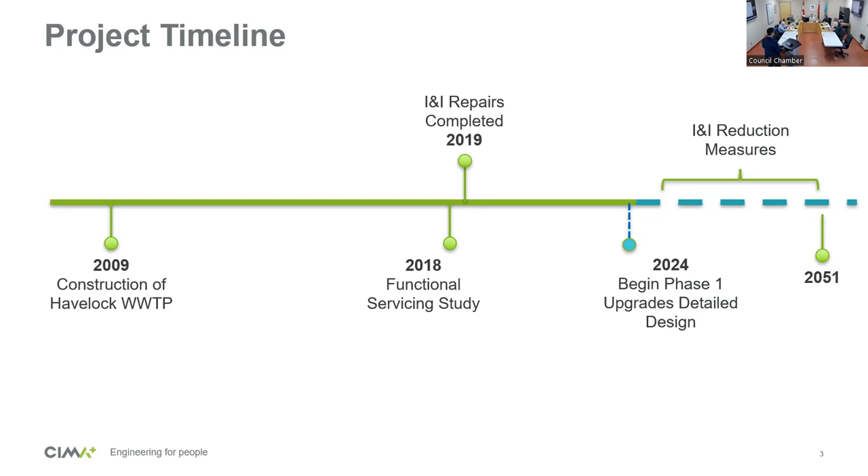There was an EA completed last year to look at alternatives, and if we follow that timeline, the proposed next step would be to begin phase 1 of the upgrades recommended as part of the EA. The other recommendation is to continue with I&I reduction measures to give you more capacity and recover some of the capacity you're losing through I&I. Then at some point, you're going to have the phase 2 expansion.

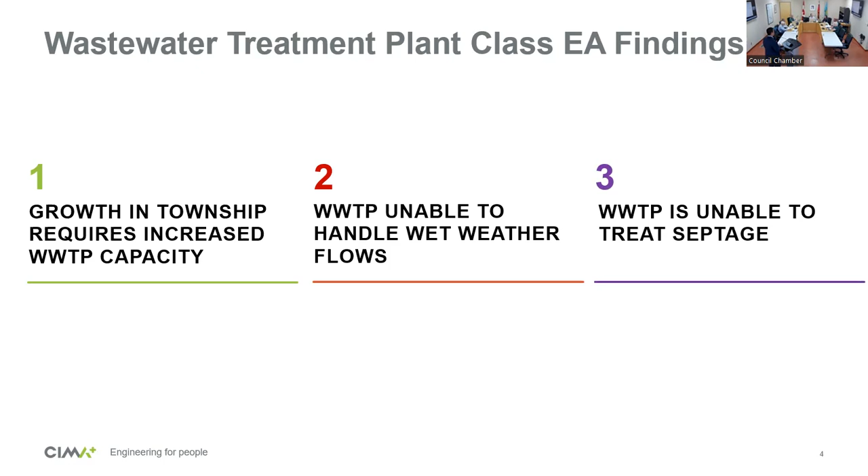The EA completed last year identified three main issues. There's growth planned in the community that's going to drive an increase in flows to the plant. There's significant infiltration and inflow issues during wet weather conditions that have exceeded, in the past, the capacity of the plant. If growth continues, at some point this might lead to environmental concerns and non-compliance issues. The third issue was that even though the plant was designed to handle septage from septic systems, because of all these constraints, it's limited in its ability to receive septage. So those are the main three issues identified, the first relating to flows and I&I.

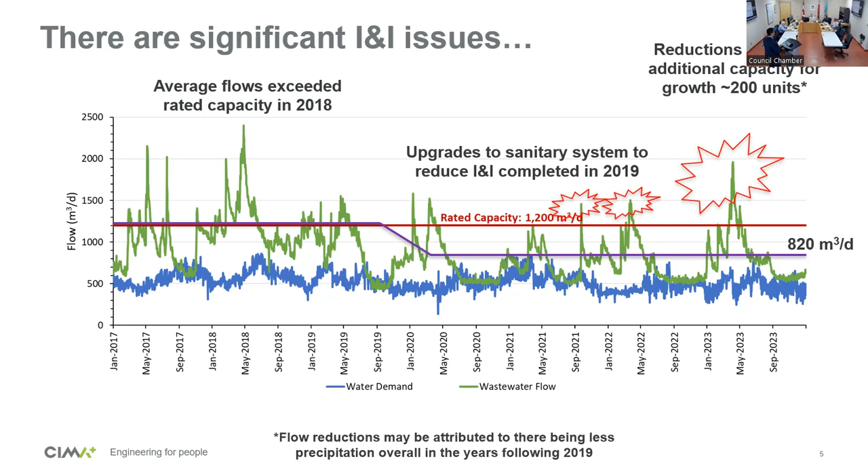So the Class EA recommended a staged approach to addressing the capacity constraints of the plant. The first recommendation was to do a phase 1 upgrade to mitigate the effect of infiltration and inflow, the wet weather flows. That was recommended to happen as soon as possible.

The second recommendation was to continue monitoring the flows of the plant and see the impact of your George Street project and other I&I reduction projects to see how much capacity you gain, and then continue pursuing reductions in I&I. As you saw in 2019, there was a significant drop in flows to the plant as a result of that project, which got you about 200 units of recovered capacity.

And then there's a financial component of these projects. You have to be able to find and fund the money for these projects, right? So there's rates and development charges, and then also funding opportunities that can be pursued.

And then the last step of the implementation would be a phase 2 upgrade, but that was recommended to happen later on, once you've got about 80 to 90% of your current capacity used. Depending on the timing of development, that could be upwards of 2040, or if development happens fast, it might push earlier.

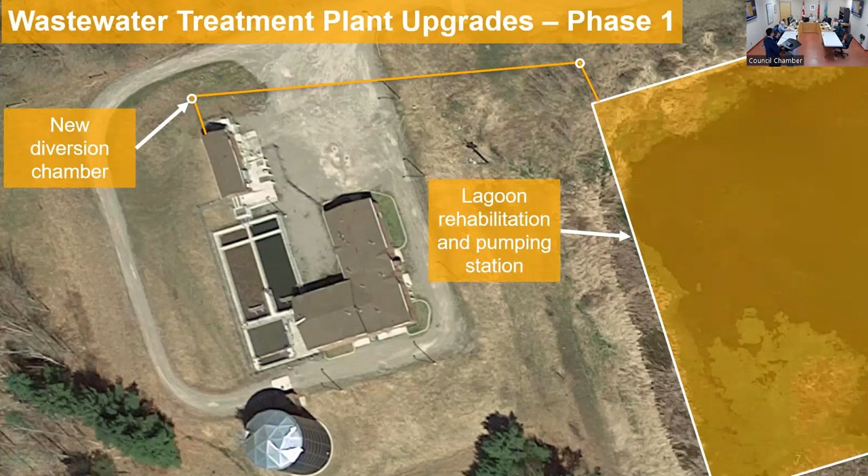So it's a relatively simple upgrade. It's a diversion chamber, retrofits to the lagoon, a pumping station, and some minor miscellaneous electrical upgrades.

So that's phase one. Phase two is significantly more complex because we are actually increasing the capacity of the plant from 1,200 cubic meters per day, which is what it's rated for right now, to I think 1,580-something was the number that was recommended. That's basically more flow, about 200 more units of development assuming 3 people per unit.

So that is a significantly more complex project because you are adding more processes to treat the flow. You're adding a new process train, another tank to hold the biosolids, more filtration capacity, etc.

And yeah, that's the cost. There's obviously a significant difference. Phase one, the estimated high-level cost is 5.5 million, whereas the phase two upgrade is significantly higher, close to 15 million.

So obviously there's a significant investment required for both projects, but the idea is phase one would be done first, as we talked about last time. Phase one solves one problem versus phase two solves a different problem. But the most pressing problem you have right now is the wet weather flow, the problem that phase one solves.

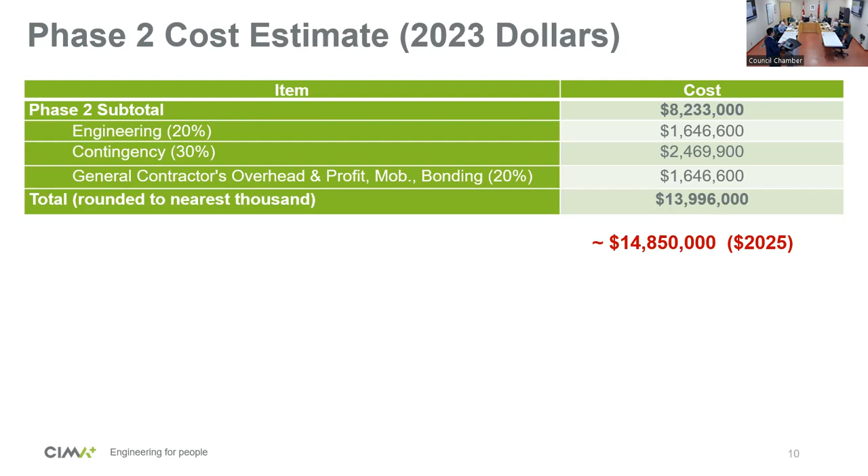So yeah, we're back to the questions. How much capacity would be gained by completing phase two of the project? We talked about the 200 units, depending on how many people per unit you've got.

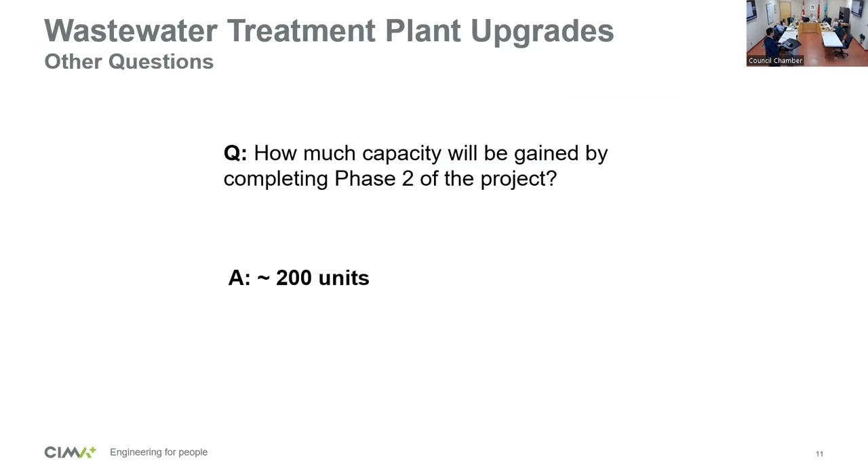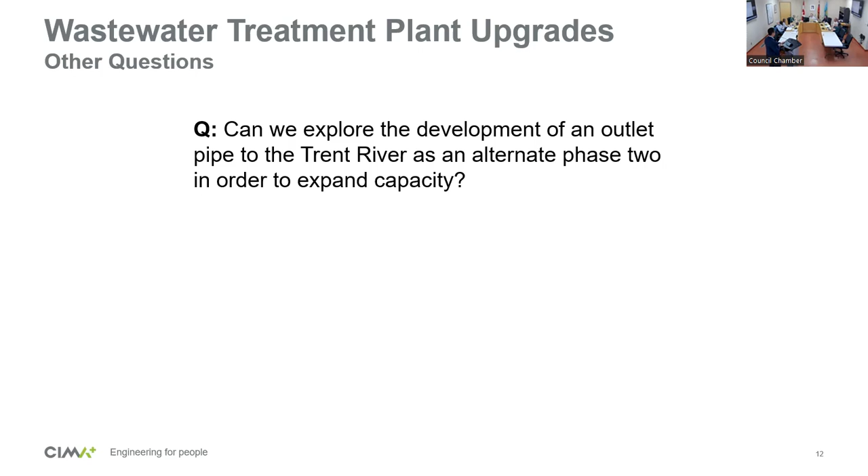We talked about the Trent River option as an alternative phase two. Yeah, it is definitely something that could be looked into. At a high level it doesn't appear to be cheaper, because of the distance you're pumping, the need for a new pumping station, in addition to the need to do significant planning and consultation with the ministry. But it is an option that could be explored in the future.

The EA process, I mentioned last time, is being revamped a little bit, but based on the current process, each EA study has a validity of about 10 years. So if you complete your works within 10 years, you don't have to redo the EA, unless you completely change what you're recommending. And then it could be easily amended if a new EA is required.

Noting that the ministry is currently changing the process for the EA, so it might not look the same as what the last EA looked like. But yeah, 10 years is the validity of the EA process.

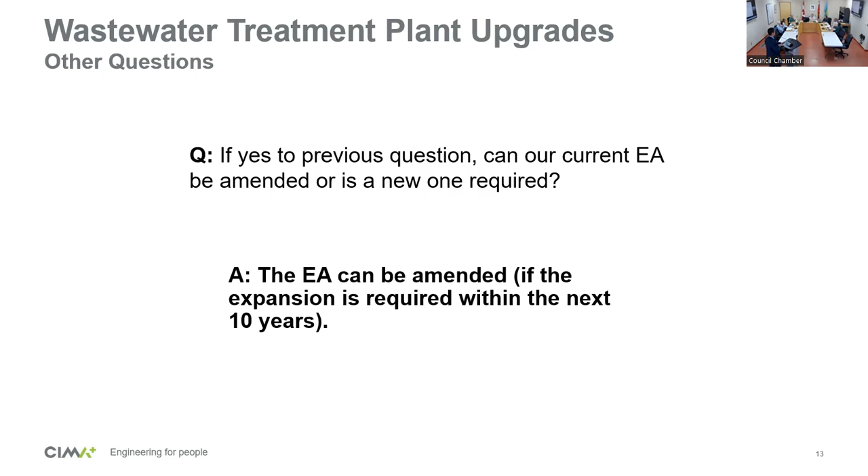We talked about how much capacity could be added with the Trent River versus phase two. So phase two, as it stands right now, is increasing the capacity of the existing plants. With the Trent River option you would still need to increase the capacity of the existing plant, but instead of discharging to Plato Creek, you're discharging down to Trent River. So the process itself would be slightly different, but you need a new pumping station and a force main to pump down to Trent River, and you still need a capacity increase.

Right? So it's just a question of how the expansion is done, not whether the expansion is done or not. So phase two is still required, whether you do it at Plato Creek or not. And then phase one, as I said, is an issue of dealing with those spikes in flow, and you would still need to do that regardless.

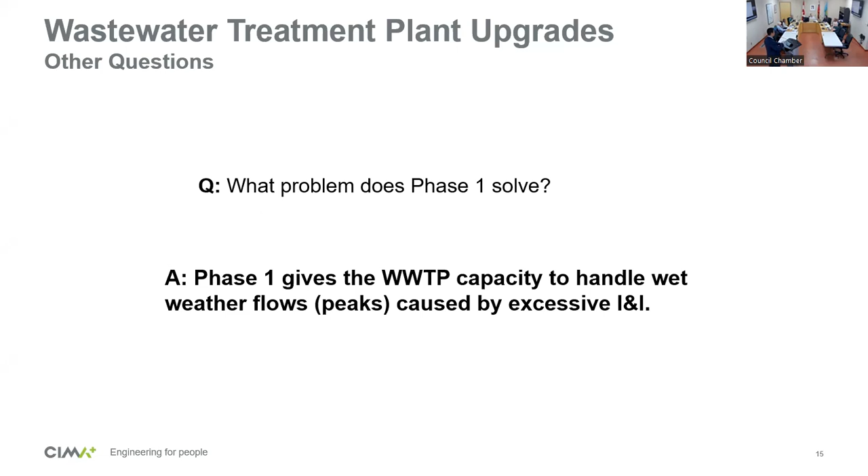So again, segue into this question, what problem does phase one solve? It's dealing with the significant I&I in your system and basically allowing you to treat a more gradual and more stable amount of flow into the plant, as opposed to dealing with those spikes caused by rain and snowmelt.

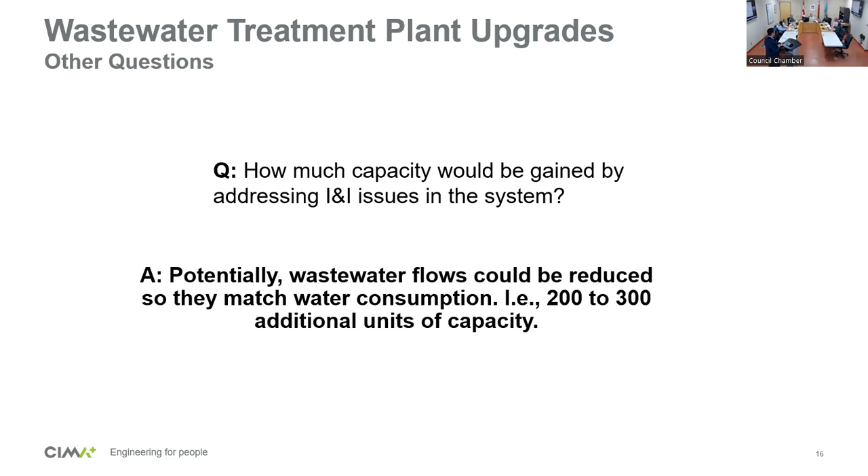This is another question that came up. How much could you gain by addressing issues of I&I in your system? Very difficult question to answer, but hypothetically, imagine that blue line, and I think I have the chart again. If you could make it so that 100% of the water that you use goes to the sewer system, and you could eliminate everything else that comes into the system, then both lines would look very similar. Then that reduction would be significant, about 200 to 300 units of capacity on average, if you could make those two lines come together, right?

You would expect in a sewer system that most of the wastewater that gets produced should be coming from your cooking, your showers, and so on and so forth. But in this case, there's a lot of other water getting into the system from the groundwater, from infiltration, from other sources. And that's water that, first of all, you're not recovering any rates for. And it's applying pressure on your system. It's costing you money to treat, right? It requires chemicals, it requires manpower, and it also takes away capacity that you could be using for development.

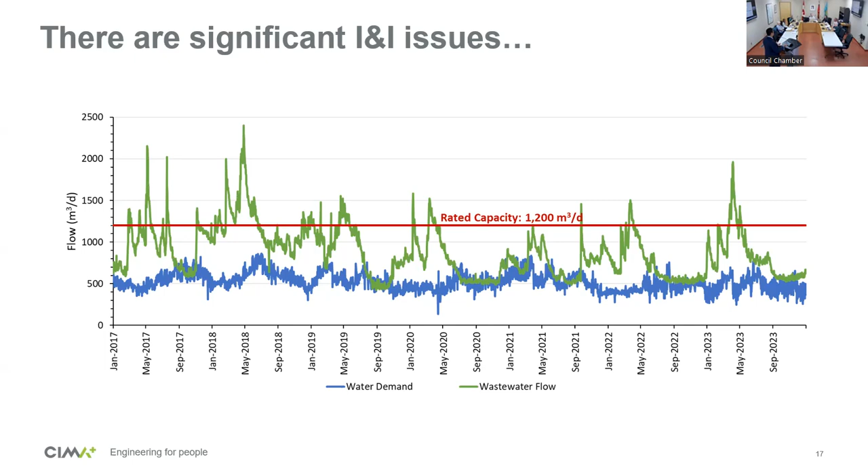So if you could make those two lines converge, then you could gain potentially up to 200, 300 units just by reducing all those flows. So Gustavo, using the lagoons would hopefully eliminate some of those green spikes. That's what you're saying? Yeah, you would still see that flow go to the plant, but instead of it having to be treated by the plant, now you store it. So essentially right now you're at 820 cubic meters per day, and you have a capacity of 1,200 cubic meters. So you could go up to the 1,200 cubic meters without fear of flooding or overflowing the plant, right?

So if we were able to get the lagoon going and help us on those spikes, would that allow us the 200 to 300 homes? Yeah, I think the report in the EA had a number. So right now we're assuming that long-term care projects continue, but beyond that, we really recommend you do phase one. Yes. And then the next trigger for the next study or next project would be when you get to 90% of 1,200, right?

So you'll continue to see once new units get connected, you'll see what the effect of those is on the system, and you'll see where you are relative to your line there. And then once you get to about 80 to 90%, you start looking at maybe getting more capacity in some way. Right? Yeah, the part I'm trying to figure out is to go and spend that kind of money on phase one.

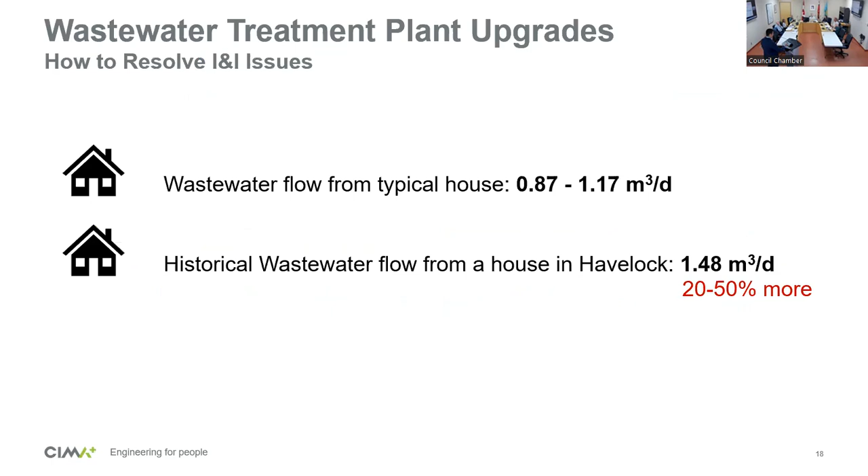So thanks very much. Yeah, and I think I have this discussion - this obviously came up last time. Was how do you fix it, right? How do you fix the I&I? Like I said, you could look at it two ways. You could look at fixing the problem at the source, if you will, or fixing it at the end, right?

And that's what phase one is - fixing it at the end, because that's where we can actually control it. But if you were to replace your whole collection system and seal it, and put all the joints and all the manholes, cover them, seal them perfectly, initially you could reduce all that I&I. Over time, you would still see issues, but obviously that's an expensive endeavor. We look at that number - $48 million if you wanted to replace your whole system - because you're digging up the roads, and once you dig them, you're replacing other utilities too.

So it's the same problem that other small and larger municipalities, frankly, are seeing - it's hard to fix stuff that's on the ground. Different folks choose to address it differently, but that's why we presented these two options, to say, okay, well, we understand $5 million is a lot of money, but it's cheaper than 48, right?

Yeah. Councilor Flagler had a question. I just had - actually, it's probably not so good a question, but I'm going to ask it anyway. So right now the rainwater is getting mixed in with sewer water, correct?

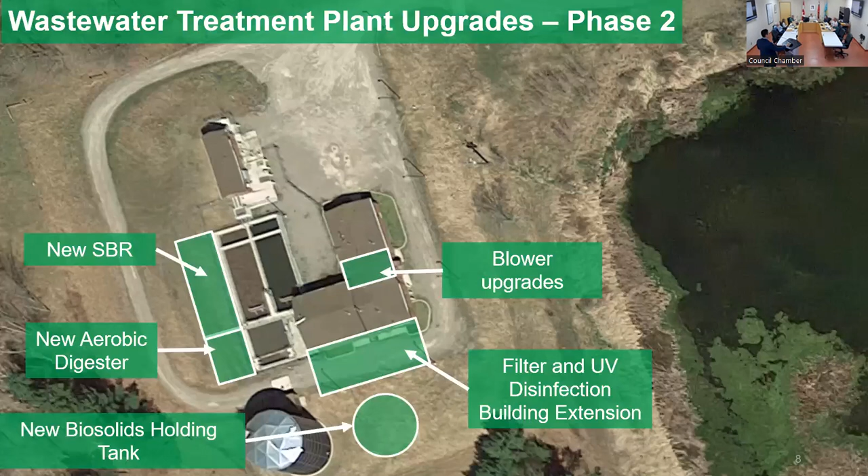We anticipate probably the top northwest corner. This is very conceptual, but you have to drain the lagoon, then build a berm just to isolate that corner, and probably put a liner on it to make sure there's no infiltration. On top of that, there'd be some piping that connects to a new pumping station to allow you to drain the lagoon.

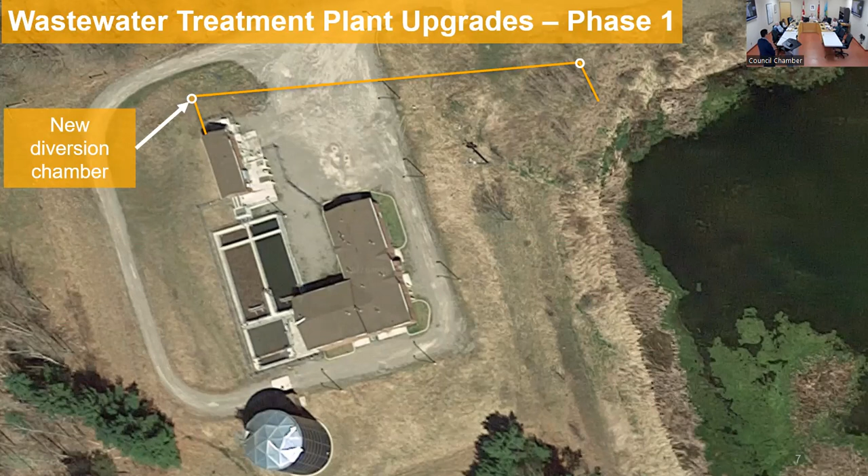That's why we discontinued the lagoons in the first place—we had a leak that was supposedly happening in the lagoons. That got us into the discussion of putting new lagoons in at the time. Some council wanted reed beds, like Stirling has, since it's a cheaper way of dealing with things—you don't have a mechanical plant, just let it do its natural thing. But in the end we went with the mechanical plant, excited to have 1,200 cubic meters and double our capacity. Then the infiltration issue came up, and it wasn't showing the results we expected. So that's where we are today.

That's kind of fixing it at the end instead of catching it in the road, but it's a cheaper alternative. Still expensive, and it looks like it could allow a couple hundred homes in the end to get us through to 2040, possibly. George Street's going to be a big thing to see what impact that has. Back when we first did this, I remember a leak we had up by the car wash—it was huge, the water was coming in like a fire hose. We fixed that, and you could see on those flow charts within that month it made a big difference.

If you look at eliminating the spikes, we're down around the 500 level, maybe 500 or 600 here. So if we have a place to put the overflow, we might even have that. It's just about being able to manage these spike events. If you put it in the pond or somewhere else, the rest of the time we're probably running at only half the capacity, if that, by the looks of it.

It also helps from an operations perspective—if they ever have a failure with a piece of equipment, they have the ability to temporarily store the flows rather than calling the ministry to say they're out of compliance. You have more flexibility to deal with risk. We did a similar project in Lindsay—they have a similar situation, with a lagoon used for the same application, and they're retrofitting it because they also have loss of land. So it's not an uncommon problem in this sort of application, especially since you already have the infrastructure there—it's just a matter of hooking it up.

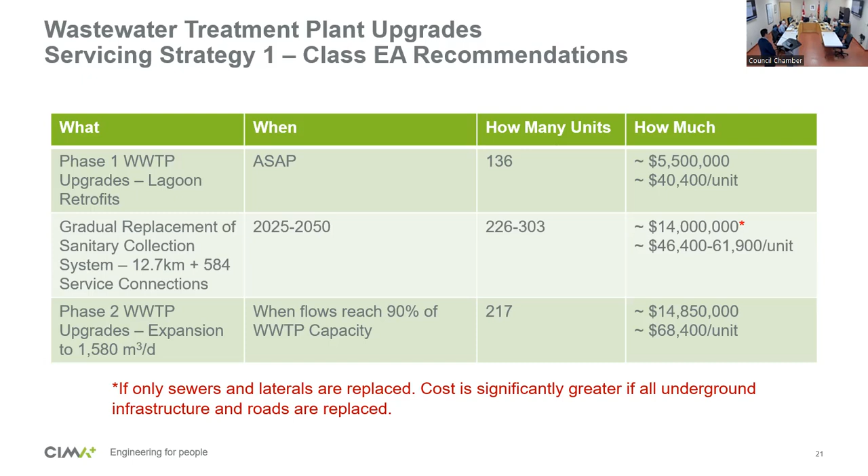So that's the first strategy, the one we recommended. Now just for illustration purposes, if you were to replace everything today - just the sewers - that's 14 million, but if you're replacing roads and water mains too, that's 48 million. So it's not cheap. If the question is where's the money coming from, I think it's easier to get 5 million than to get 48.

But just for illustration purposes, you see there's two projects. If you do fix your I&I problems, you don't need the peak attenuation - you don't need phase one. At some point you would still need phase two because you're going to reach your capacity, but if you could magically reduce all those spikes, then you wouldn't need phase one.

How do you magically remove rain? Yeah, I was just thinking Rogers is building all these cell towers - maybe we could get a dome put over Havelock and the dome down in Toronto, and it'll eliminate all the rain. You could direct it all just to the farmers' fields, to the gardens. We put eavestroughs around town, I guess.

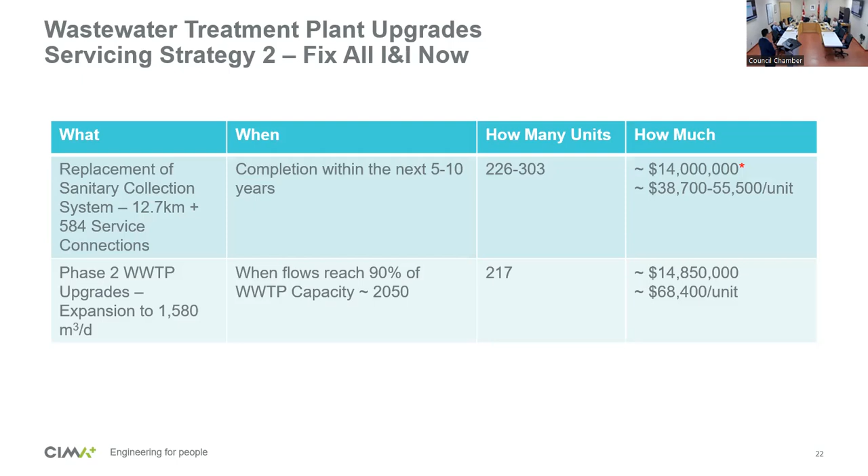Just to summarize the recommendations in the past: phase one, do as soon as possible. Understanding there's the long-term care project that's already been approved, but there are other developments that want to go ahead, we'd advise starting to look at phase one as soon as possible so you don't get in a situation where your capacity gets exceeded, and then continue monitoring flows to the plant.

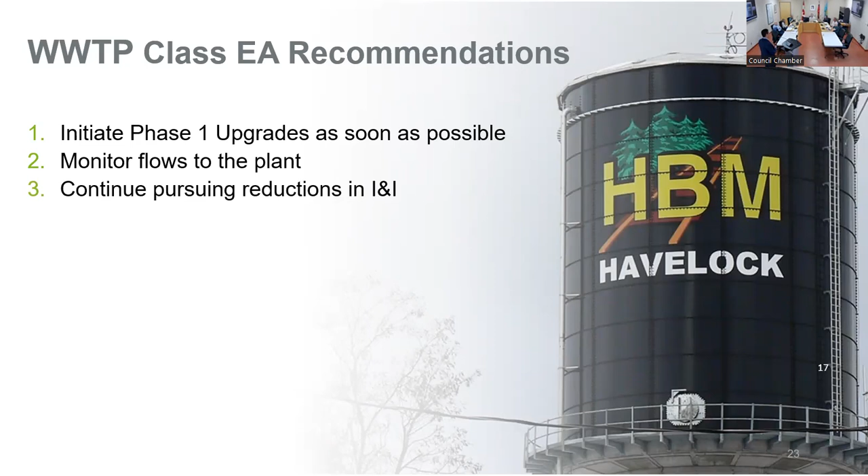Let's see what happens with that George Street project. Hopefully that gives you another 200 plus units of recovered capacity. And then as you grow, as your new units come online, see what that flow coming in looks like. When you're about 80 to 90%, that's when you want to start looking at the next expansion. And obviously there's that asset management, water, sewer rates, and DCs that complete the picture to make sure you're able to recover the cost of these upgrades through development.

And we talked about funding opportunities. We don't know of any active ones right now, but we know there's this push for new development from the province, so we anticipate more opportunities to apply for funding, and these projects typically emphasize projects that are shovel ready, if you will. So that's another thing to look into for sure. Phase 2 upgrades would be the last piece of the puzzle, if you will.

And that's it for the recommendations.

Yeah, I'm sorry, it's Monday, I'm a little slow this week, so 200 units capacity. Now, do I take 128 off of that for the long-term care? No, sorry, in what context, for phase 1, you mean? No, just the capacity. Sorry, the mayor's, what?

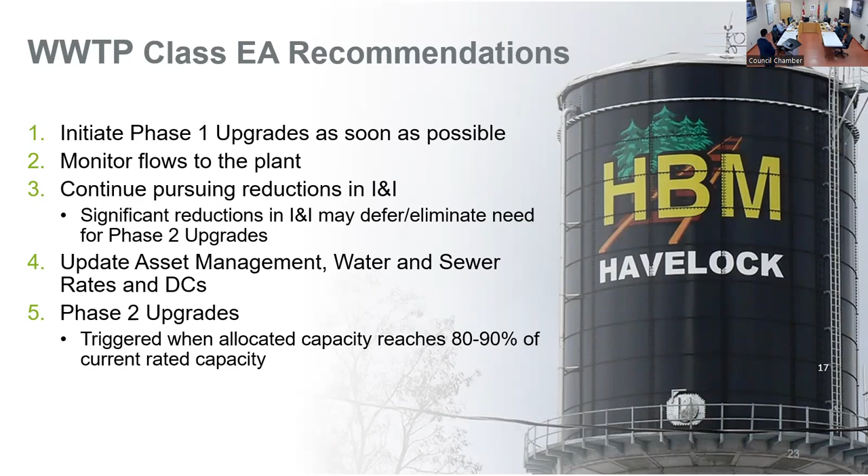So maybe I'll go back to, if you know specifically which slide number, but we've been throwing this 200 number around. Sorry, it's just, I don't mean to interrupt, but there are significant I&I issues, and then it says reductions provide additional capacity for growth of 200 units. I see, okay, so that to me is pretty straightforward. Yeah, so either we have or we have not.

I think in the context, sorry, I confused you there. What I was talking about here is, if you compare the flows from 2018 to after that leak or whatever it was that was found in 2019 was fixed, what that essentially gave you was a reduction in flows equivalent to 200 units, right? That was if you look at 2018 versus the average for the last few years. So that has nothing to do with the long-term care or the phase 1 expansion. It's just simply saying there was a significant reduction in flow between 2018 and now. That's all it's talking about. It's not referring to how much capacity you have now. It's just saying that you reduced the flow between 2018 and 2019 by that much.

Now, if you integrate, to try to close the loop here, the long-term care system, once it gets connected and hooked up and starts using water, you would expect some of that capacity to be used up. Some of that 200 spare capacity will be used. That's just what I asked though. Yeah, and I have several different opinions on it. What you're telling me now, and I understand that, is that does take away from that capacity number. Sure, yeah.

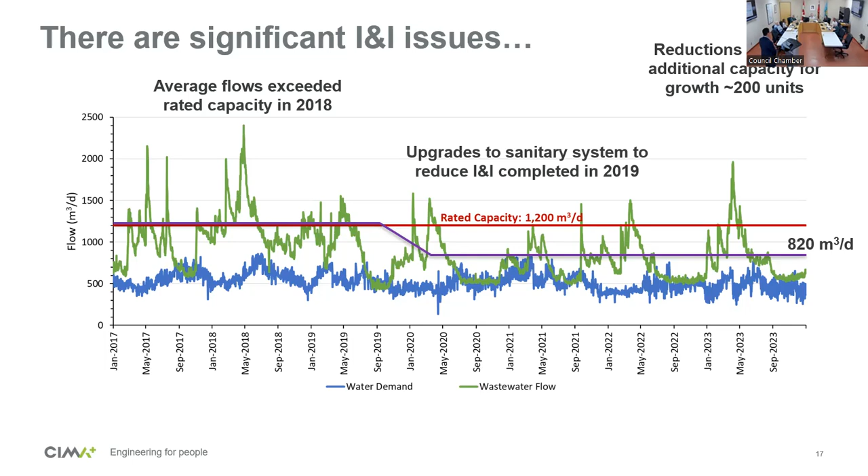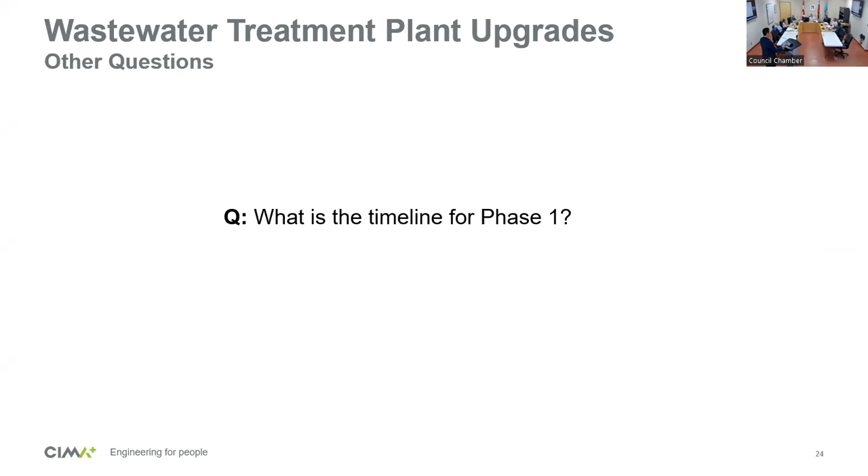So yeah, this was talking about the timeline for phase one, just in line with what we did. If it goes ahead, then it would be completed by 2026.

So if you have development applications that go through that process and are timed such that they don't come online until 2026, then you basically have just-in-time capacity.

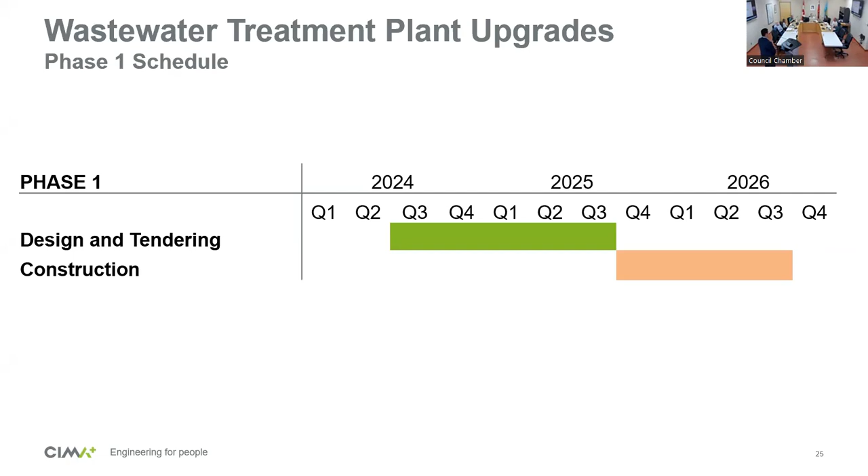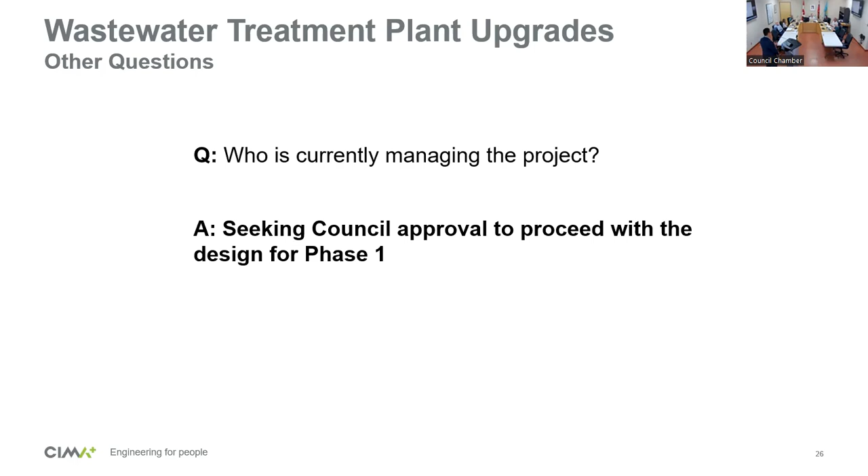So part of what we have to do, and the reason why we have those 30% contingencies, is there's a lot of unknowns right now. So we would have to do additional investigation, geotechnical, hydrogeological investigation, and other types of studies that have to be done to characterize what has to be done.

And once we have that information, it reduces the risk to the estimate and reduces the contingency, right? So as we progress through that design phase, when you get to that 100% detailed design, you would expect your contingency to be significantly lower than 30%.

So that's generally the scope of the project from an engineering perspective. There'd be three stages: design, tendering, and construction, expected to be completed by 2026 if it starts this year.

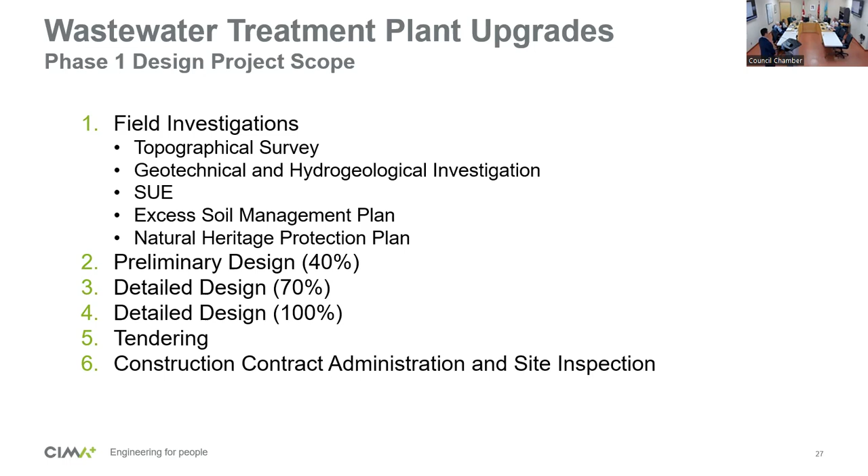The engineering component, the 5.5, already includes the engineering. So the design component would be separate from the construction services component. But that could be discussed further after the project gets tendered.

Just to give you a hint, one opportunity for reduction of costs is that when we put in the cost estimates for engineering, we used a very high number to be conservative—about 20% of the total capital cost. But if the capital cost goes down, it won't be as high. Depending on the specifics of the project and the requirements for construction services, the overall engineering amount would actually be lower too. In the grand scheme of things, that's about a 5% reduction to the overall cost of the project.

Just wanted to note that. So that's it for the first part of the presentation. I don't know if there's any other questions.

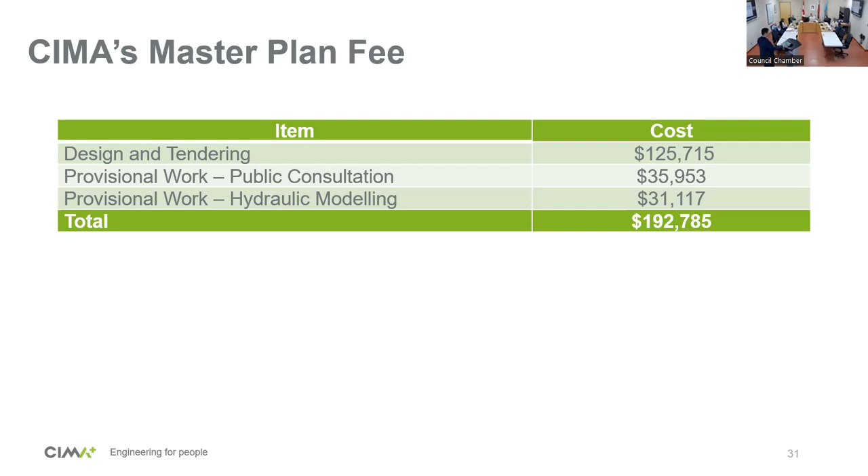Yeah, so that's it. That's the end of the presentation.

So for today, with phase one, there's two parts to it. The big thing is going to be getting funding or some help with that. Is it possible to get a motion that we explore this and try to move on with it? Because we are going to have to do it, it's just how we pay for it. That's going to be the biggest question of all. I don't know what the motion would look like, so.

Okay, good, go ahead. It said we have to do it, and it's up to the rest of council as well. In terms of me, I don't like the price either, but I think in terms of moving forward we're going to have to do it, so let's get it started. If we get the design work started, we can worry about where we're going to get the money eventually, but let's get it started.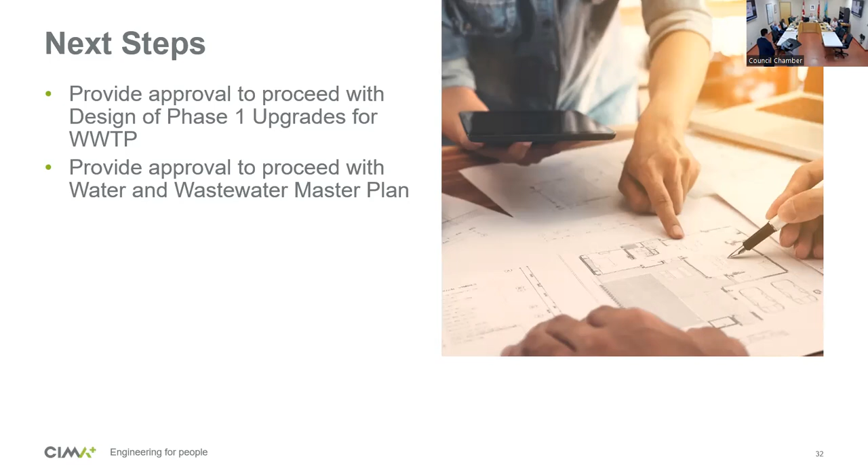A second. Yes, so you're moving that? Sorry, Gustavo, you had a slide that showed phase one design, can you just bring that up? There, that one. So I think your motion is to proceed with this.

So your motion is we're going to tender this job now without having money? No, we're going to do the design and tendering. Is that what it says?

But we won't be able to tender until we figure out where the money's coming from, and hopefully we can figure that out shortly. Part of the question is, what is the motion? Is the motion to do what's on the screen? It would be to direct staff, I think, to move ahead with this, or figure out how we can move ahead with this, because the funding is going to come into it.

So, direct staff to look into beginning the process of phase one. I don't know if we want to keep it general. And that would include, and then we'll get a report back contacting us how we can pay for it, where the money's going to come from, and to finalize it. But for today, it would be to direct staff to figure out how we can move ahead with this.

So, okay, let's move this, moved by Deputy Mayor Webb. I'm still second, you're seconding that? Okay, record, any questions? Okay, record a vote.

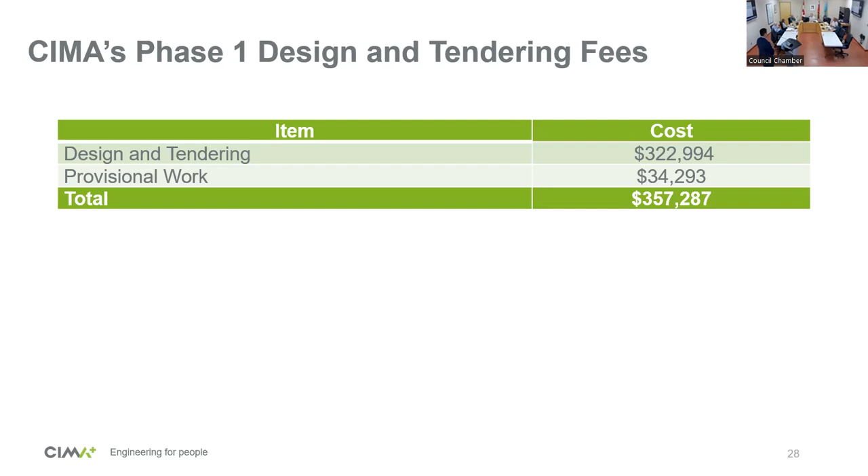All right then. So the next one here is with regards to, and I don't know if this could wait till budget, the water master plans, I don't know if it's as urgent. I know it's urgent, they would complement each other, and it would really go along with our asset management plan.

But for today, do we need a motion on that? What's your thoughts, to get the same sort of thing going to find out how we can get something like that going, or we can refer it to budget? Yeah, well, I think probably both.

I think it's something that'll have to come to budget. I just had a question for Gustavo, in terms of, you already asked about funding for the overall project, is there funding available for stuff like the master plan, or grants rather? Typically, no, unfortunately.

Gotta ask. So right now, the motion I would think would be to refer this to budget, and staff can look into if there's any way of funding something like that.

A question first, if we can, or do you want to wait to get a seconder? Go ahead. On the generator that we're getting replaced, is it because its life expectancy is coming to an end? Is that the main reason? That's the next part of it, so we'll get this part out of the way, and then we'll move into the second.

So, okay, so you were moving that, you have the refer to budget? Refer to just budget, start looking into it, yeah. And seconded by Councillor Clement. Any questions around that?

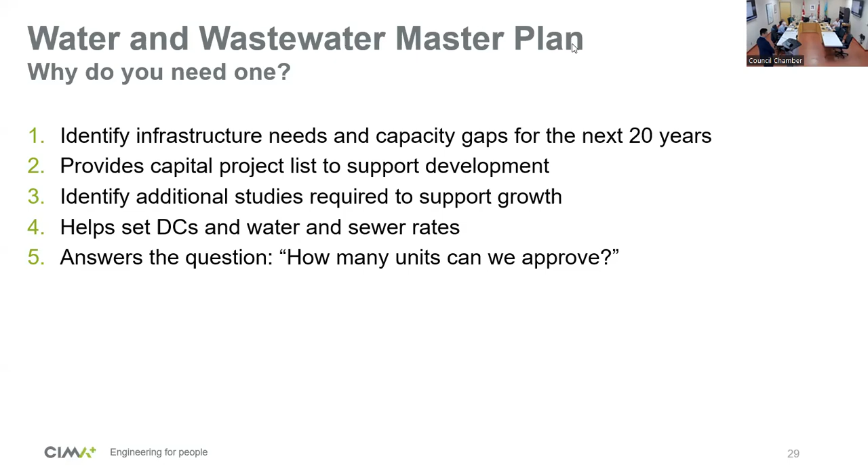Yeah, we're gonna take 5 minutes and then we'll do our level adjustment and whatnot. Everything now, I thought you were gonna lose your voice maybe, and then you'll say, I can't do it.